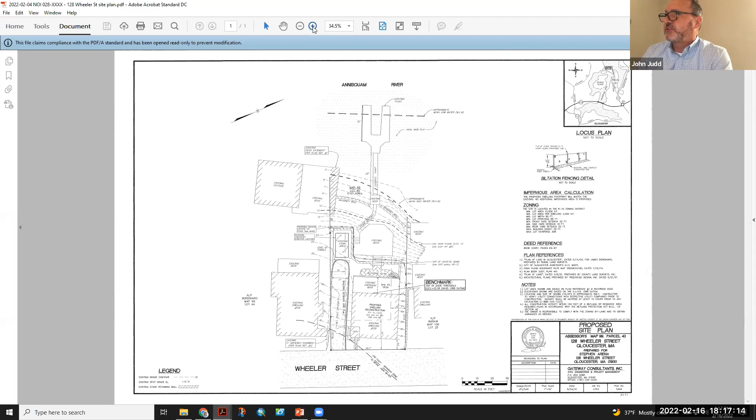You may recall at the last hearing there were a couple of requested modifications to the plan, which we submitted to the commission or to Adrian right afterwards. I can go through those minor revisions, one of which was to add the shrubs in front of this house. This is a reconstruction of an existing dwelling on the same footprint, the same foundation. There was a request to add the existing shrubs in front of the house and on the side of the house, with a note that any shrubs to be removed would be replaced at a 2-to-1 ratio.

This is the original plan, Adrian. We should have that modified plan revised the 3rd of February. One of the other modifications was, it was requested that we show that small catch basin at the bottom of the driveway, and where that outlet is a 4-inch pipe that discharges from that catch basin, and that is shown on the plan. Thank you, that should show it there.

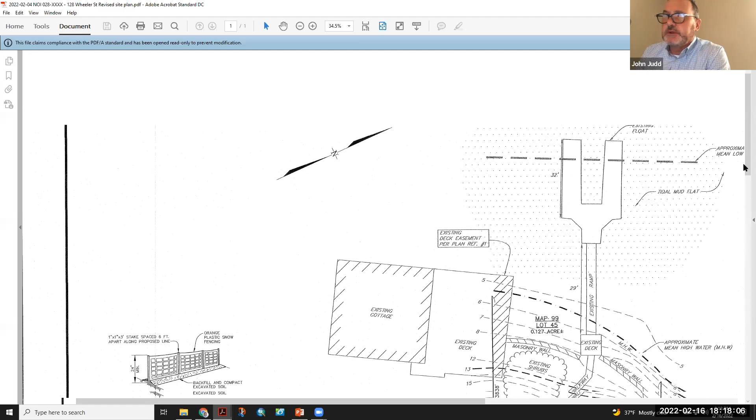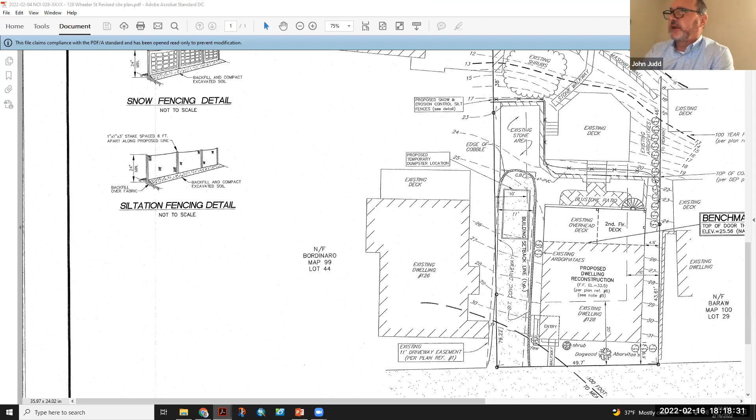A little bit further up, we'll show that catch basin. You can see at the bottom of that circular cobble line driveway, just below the proposed dumpster location, is a catch basin. You can see the 4-inch discharge pipe that goes into some crushed stone underneath the existing elevated deck. We did add a note that any shrubs or vegetation to be removed would be replaced at a 2-to-1 ratio, and that's shown on the plan as well.

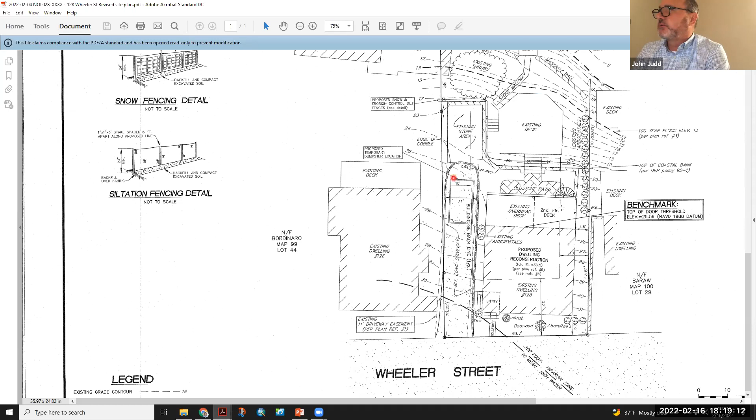So we did move that dumpster back into the paved portion of the driveway. There's a spot where it says existing stone area, that's where we originally had it situated - it's a flat area down there, but we moved that back into the paved area. I think that was one of the comments that was requested. On the upper right-hand side of the plan, we have mitigation notes indicating that a 2-to-1 ratio of replicated plants will be required for any of those shrubs to be removed. And I think that was it - those were the requested modifications.

Okay, so what I'll do is we'll open up for public comment first. Seems like we're having a little bit of a bandwidth problem tonight, so people just be patient. If anyone in the public wishes to speak for or against the project at 128 Wheeler Street, you may do so now by hitting the raise your hand button at the bottom of your screen or hitting star 9 on your phone or handheld device. There are 19 attendees on the call and no members of the public to comment at this time.

I thought we'd have someone. It was Barry. Who - no, I thought we might have someone talking about this. That's fine.

So, seeing none, hearing none, we'll close the public comment period and move on to commissioner roll call comments. Comments from commissioners: Commissioner Charpentier, no comments. Commissioner Cook, no comments. Commissioner Gradwall, no comment. Commissioner Sargent: Any mitigation plantings, will there be a 2-year monitoring of mortality?

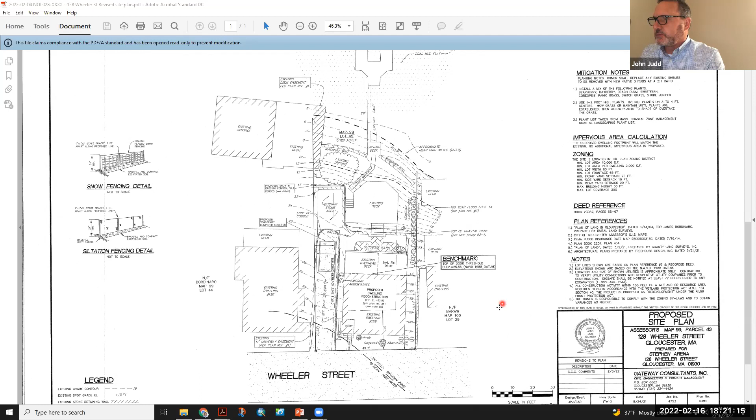Co-Chairman Gullo: My only comment was the tree loss. So we're gonna lose the dogwood out front. Are we gonna get the same species back that we lost when these are removed? I see plenty of arborvitaes.

Those arborvitaes are in tough shape. They might be beyond their useful life - I'm not sure how healthy they are. There's a yew on the front left and a conifer shrub to the right of the entry there, and the dogwood.

So those we could replace in kind. We did give a list of suggested plants, shrubs and trees on the plan that are more native and salt tolerant, but the main emphasis was native and a 2-to-1 ratio. That was what I thought we had agreed on. I just didn't know if - well, that's fine. I would agree with that.

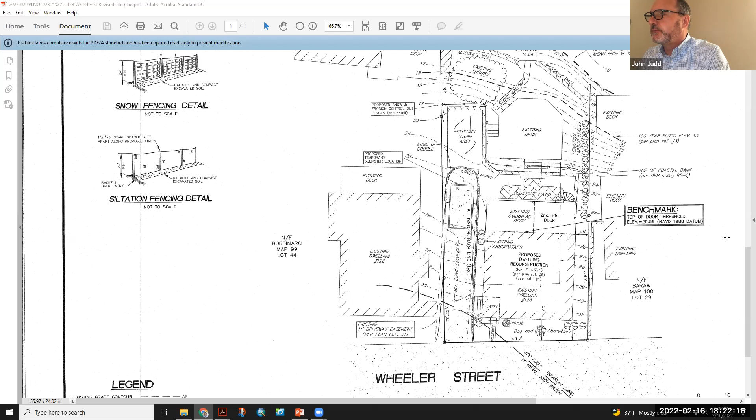Commissioners, any other comments on this? We reviewed it last time. We have a mortality clause - 2-year mortality on the plantings. Anything else to add?

If nobody has anything else to add, do we want to close the hearing on this? Sure. Commissioner Jackson moves to close the public hearing for NOI 0282825, Charpentier, 128 Wheeler Street.

Charpentier seconds. Roll call: Commissioner Charpentier, yes. Commissioner Cook, yes. Commissioner Gradwell, yes. Commissioner Sargent, yes. Commissioner Sherman, abstain. Co-Chairwoman Jackson, yes. Co-Chairman Gullo, yes. Thank you.

Okay, if nobody else has any comments, move to approve. Commissioner Jackson moves to approve NOI 0282825, 128 Wheeler Street. Charpentier seconds. Roll call: Commissioner Charpentier, yes. Commissioner Cook, yes. Commissioner Gradwell, yes. Commissioner Sargent, yes. Commissioner Sherman, abstain. Co-Chairwoman Jackson, yes. Co-Chairman Gullo, yes. Thank you all very much.

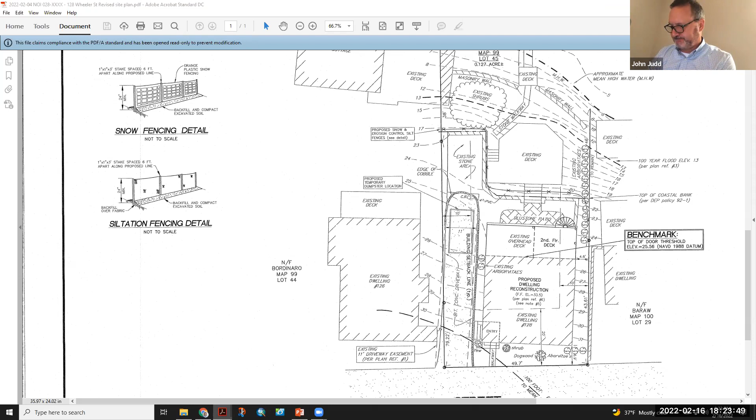You're welcome. Next up is Notice of Intent 28-2822, 30, 48, and 50 Atlantic Avenue, Goodhue. Bill Manuel at Wetlands and Land Management, Inc. represented.

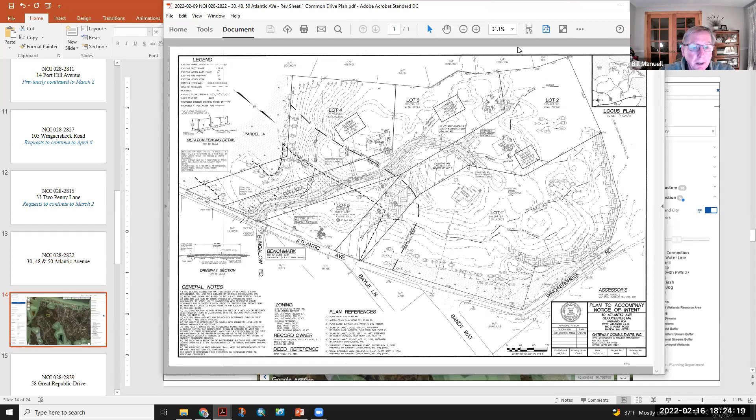Hi, good evening everyone. Bill Manuell from Wetlands and Land Management in Danvers. This is our second meeting, and we had our initial meeting where we discussed the project. We had a site visit that Dave, Rob, and Adrian attended. Since then, we surveyed and located the trees that would be impacted by the construction of the common driveway, and we have mitigated for those.

Also, we've shown a detail that now specifies a 2-foot wide gravel shoulder that, in conjunction with crowning the driveway, will have the water shed to the gravel shoulder and have opportunity for infiltration and shedding off to the side of the common driveway. That will alleviate the collection of sediment at the bottom of the hill on Atlantic Avenue. So we have that detail on the plan.

We have an area specified for the replacement of the 5 trees that are going to be lost. We suggest they be installed within the access and utility easement, so they won't be disturbed with future lot development. We have a specification for the trees - they're native specimens, listed right underneath the siltation fence detail. I think that was the extent of the comments, so if you have any questions, I'll be happy to answer them.

Okay, first off, I'll open up for public comment. Anybody in the public who wishes to speak for or against the project at 30, 48, and 50 Atlantic Avenue, you may do so now by hitting the raise your hand button at the bottom of your screen or hitting star-9 on your phone or handheld device.

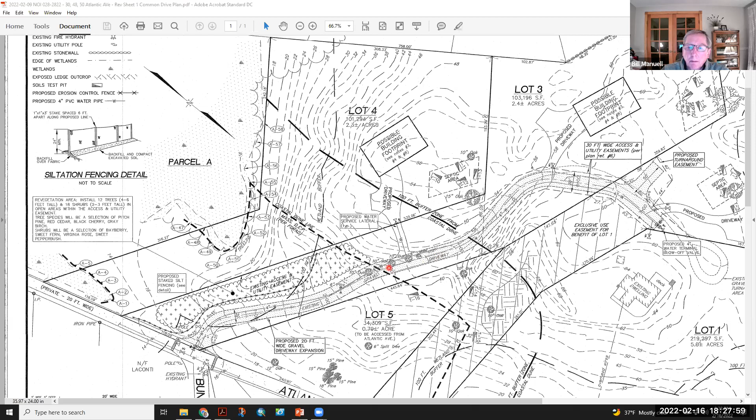I wanted to first thank you for indicating the cluster of evergreen trees on the revised plan that are across from my property at 53 Atlantic Ave. I appreciate having them shown there. I hope they'll survive all the construction of any type.

My questions are, it's been brought to my attention that the mailboxes and the sign for the WIA and the stop sign at the bottom of the drive are going to have to be moved, I guess. They're in the way according to this current plan, and I was wondering what's going to happen to them and who's responsible for dealing with that, because they're kind of important elements. Thank you.

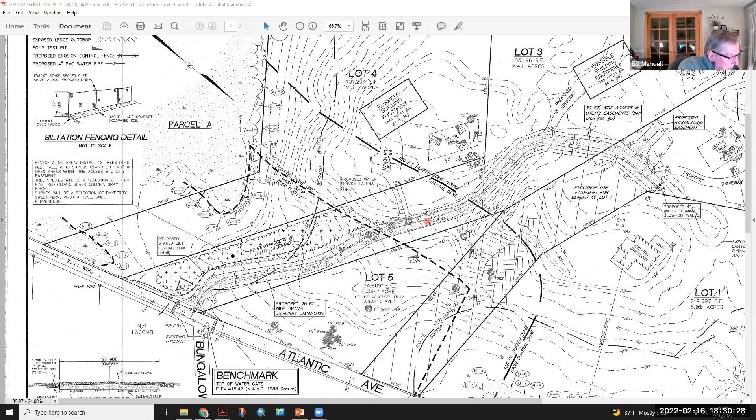Not that we take down nice maples or oaks and then put up arborvitae somewhere. No, the trees that are to be lost are labeled on the plan: a pine, an oak, an oak, an oak, and a cedar. The trees we're going to put back will be a choice of pitch pine, red cedar, black cherry, or gray birch. All of those do well in the sandy environment.

And I think we'll have to condition this with a mortality plan. Yes. Okay, that's what I had.

Okay, Commissioner Cook - oh, he's recused. Thank you. Commissioner Gradwell - no further comment. Okay, Commissioner Sargent - yes, thank you for the meaningful changes, Bill.

Because the mitigation areas are within the access and utility easement, will monitoring and maintenance of these mitigation plantings be the responsibility of the homeowners association? That's the first question. And then I agree with Commissioner Charpentier that there should be a 2-year mortality monitoring for mitigation plantings. Thank you.

Commissioner Sherman - okay. Co-Chairwoman Jackson - no additional comments. And Co-Chairman Gullah - no comments.

So with that, Mr. Manuell, do you mind answering the questions? Basically, I believe the paving issue, the parts that are jurisdictional to us, when you pave, you'll have to come before us again. The mailbox, I don't know anything about that. The 2-year mortality is self-explanatory and monitoring. I don't know if you had anything else on that list that you want to respond to.

Yeah, so we're not proposing to pave the common driveway now. And yes, if it were proposed to be paved in the future in areas of your jurisdiction, yes, the homeowners association would have to come back. I'm not in favor of any condition that prohibits it being paved in the future, because that's just something the commission can't impose on the applicant.

The mailbox and stop sign, yes, they do interfere with the driveway, and they'll have to be moved a little bit northerly. The contractor would do that at the time of construction of the road.

Yes. And the applicant, I assume, until a homeowners association is actually created - which would happen at the sale of a lot, or the first lot, I suppose - the applicant would be responsible for the survival of the trees and replacement. And then once the homeowners association is responsible, I would imagine they would pick up the cost.

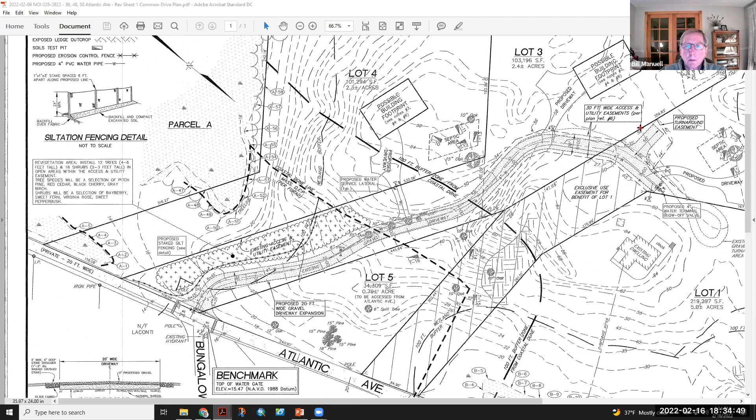So I think we're good, we should be good. Back to, just for the general public, anyone on the call now, if you're looking at the plan, to be clear, the area with the heavier or shorter dash lines through lot 5 and part of lot 4, and then the buffer outside of that with the larger dash lines, that's our jurisdictional area, everything towards Atlantic Ave. So it's minimal in the whole grand scheme of things in this entire lot, but we do have some controls.

When those lots come together, it says possible footprints, they will have to come before us again, so it will be reviewed again.

Okay, and Joe, if there's nothing else, do you want to move to close the hearing? Sure. Commissioner Jackson moves to close the public hearing for NOI 028-2822, 30, 48, and 50 Atlantic Avenue. Charpentier seconds. And a roll call, Commissioner Charpentier, Yes.

Commissioner Cook is recused, thank you. Commissioner Gradwell, Yes. Commissioner Sargent, Yes. Commissioner Sherman, Abstain. Co-Chairwoman Jackson, Yes.

And Co-Chairman Gullah, Yeah, with the aforementioned conditions of mortality, what were the others? Mortality, 2-year mortality, the mailbox is not our concern for us. And no paving, so just the mortality, I would guess, correct? That's what I have, yeah, so yes.

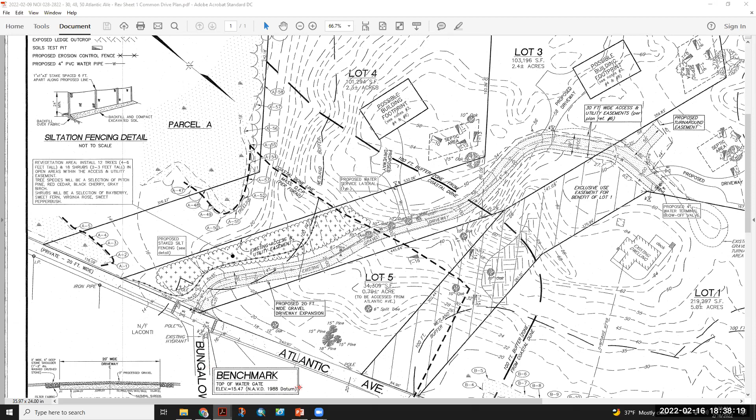We're good. Okay, next up, notice of intent 28-2829, 58 Great Republic Drive, 58 Great Republic Drive LLC, Scott Cameron at the Morin-Cameron Group, Inc., representing.

Let's find him. Oh, he's in our attendees. I believe this is Jarret. I'm going to promote you. It will take a minute for him to come over.

Hello? Hi, can everybody hear me? We can. Hi, my name is Jarret Bastys. I'm with the Morin-Cameron Group at 66 Elm Street in Danvers, Massachusetts. I'm here on behalf of the applicant at 58 Great Republic Drive. Scott Cameron had a scheduling conflict, so he wasn't able to be here, but he has asked me to come on. I've been doing a lot of the engineering work for this project.

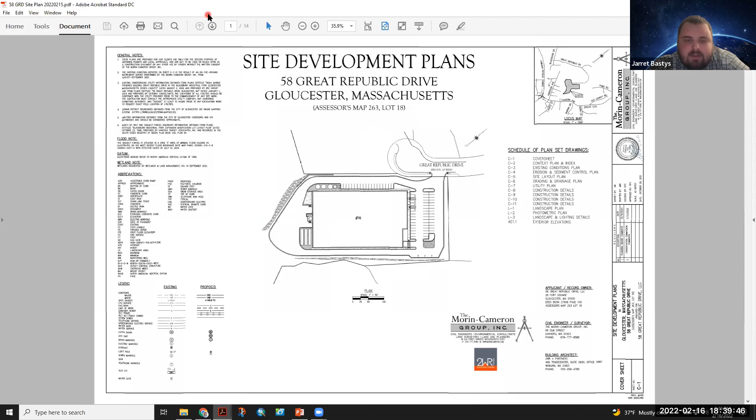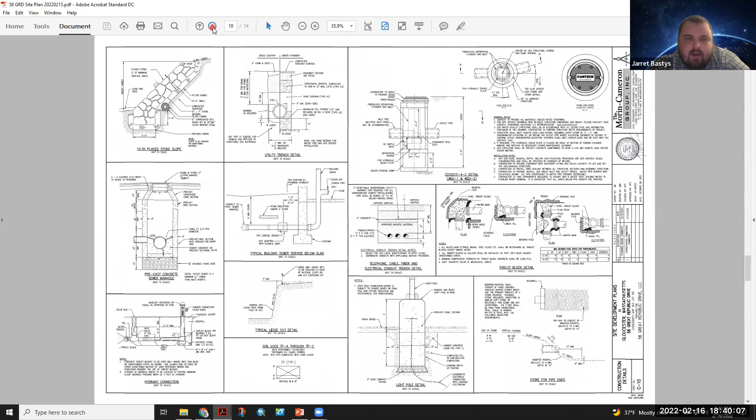At the last meeting, the commission expressed some concern about the tree mitigation in the buffer zone. So we took a look at that and went out onto the site and did a tree inventory. I'll show you, it comes up in a second. We measured 18 trees within the buffer zone that had an 8-inch caliper or greater, and we've shown on the landscape plan, yes, right there, we've replaced those trees at a 1-to-1 ratio along the limit of work in the buffer zone.

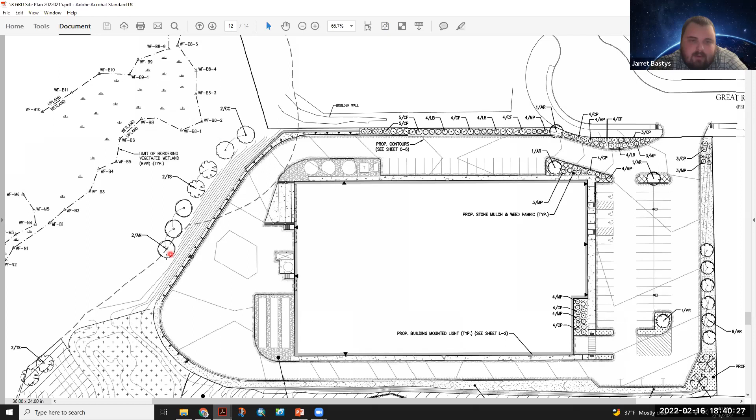Yep. And we've chosen American hornbeam, hemlock, and box elder maple as replacement trees for that.

You'll see along the limit of work, and then there's some down towards the bottom left. Oh, that little pocket, I see. Yeah, towards the edge of the area.

That's the only change we've made to the plan as of now. We've shown these diagrammatically, but we will have a landscape architect coordinate the final placement and planting. Those are the only changes I have to present. Thank you for your time, and I will turn it back over to the commission.

Okay, thank you, sir. Your Zoom presence put you out of this world.

Okay, so why don't we open this up to public comments? Anyone in the public who wishes to speak for or against the project at 58 Great Republic Drive may do so now by hitting the raise your hand button at the bottom of your screen or hitting star 9 on your phone. Chairman Gullo, there are 17 attendees on the call and no members of the public raising their hand at this time. Seeing none, hearing none, I'll close the public comment period.

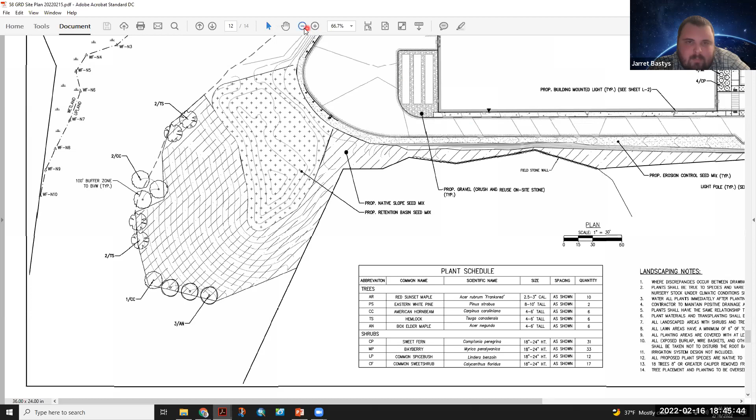So I guess the only thing to do, unless commissioners have anything to add, is we're gonna have to continue this to see a little more density in the planting, more closer to 2-to-1 for the canopy loss, and maybe the 7-inch diameter as well. Say that again, David, what are you looking for? The 7-inch diameter as opposed to the 8-inch diameter tree being specified. You mean drop it down to a 7-inch diameter requirement?

My understanding is that's what was always required when John was on the commission. So I'm not sure if you caught that, Jarret. Basically, if you go down to the 7-inch diameter instead of 8, you may have lessened your canopy concerns — it may result in less tree loss, is what we're getting at. But based on what I'm hearing from my commission now is that we're probably gonna have to continue to let you go look at that and double check the 2-to-1 mitigation and the 7-inch, not the 8-inch, diameter tree removal.

That make sense? Yes. Okay, I'm sorry about that. I don't know where the confusion was.

So with that, commissioners, if you don't have anything else to add. In fairness, I'm not sure we made those two requirements completely clear at the last meeting. Commissioner Jackson moves to continue NOI 0282829 58 Great Republic Drive to the following meeting of March 2nd, 2022.

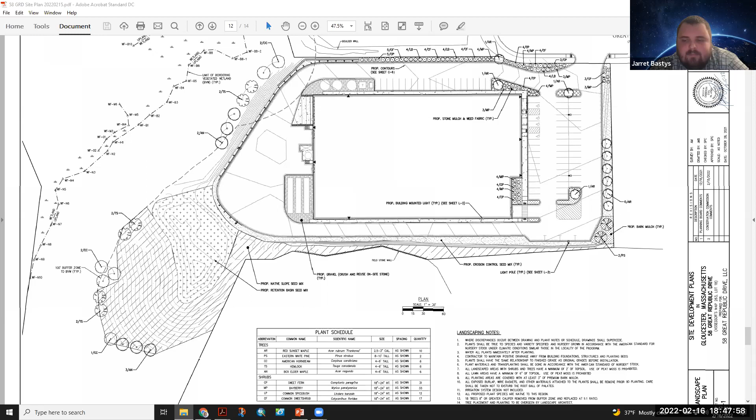Okay, sorry about that. See you in a couple weeks. Thank you.

Next up, 028-2828 Eastern Point Boulevard, Association of Eastern Point, John Gateway Consultants representing.

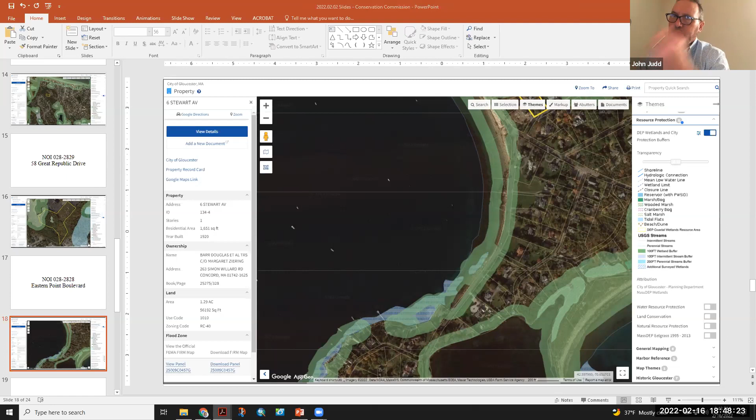Once again, thank you Mr. Chairman, members of the commission. For the record, John Judd, representing the Eastern Point, the Association of Eastern Point, for the proposed improvements adjacent to Raymond's Beach out on the Eastern Point section, Gloucester.

At our last meeting on the 2nd of February, I was given a few marching orders to modify the plan and also to come back with some information on the coastal bank. The armoring question was brought up, and you can see there what Adrian has.

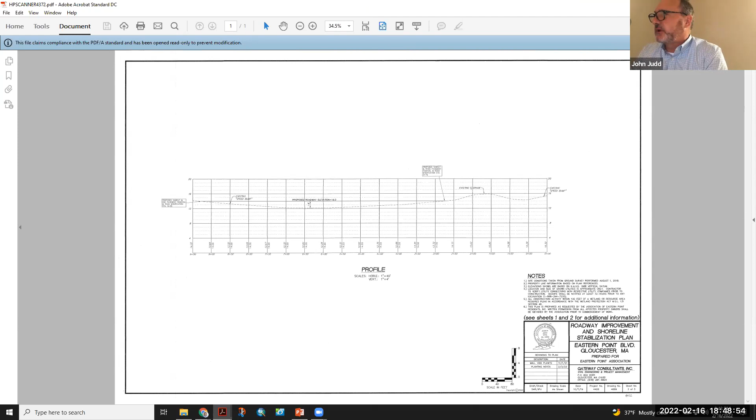There was some requested specificity on the planting spacing, and you can see we modified that detail with the revision date of the 3rd, I believe.

So what we did is we uploaded the NOAA National Oceanic recommendations for various stabilization techniques for various applications. One more slide, Adrian, we have more of a revetment. Sorry about that, there it is right there. You can see this is one of their techniques, which is basically what we have.

We have been working with various entities, including Mass Audubon and also the fire chief with this project. So we're bringing up the road at the highest point, 1.8 feet, due to the recent washouts from storm events in the last couple of years and the erosion that's taken place.

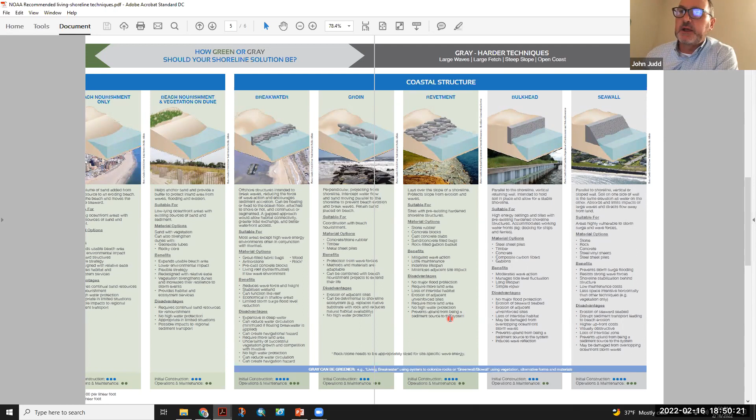So we're proposing 8-foot minimum spacing along the edge of the roadway with native plants to really make a robust natural buffer between the road and the top of the coastal bank. We have included the techniques recommended by NOAA for stabilization of living shorelines.

I believe those were the comments that were requested, and we modified the plans to indicate that. I can answer any questions you might have.

Okay, I'll open up for public comment. This is the period where anyone who wants to speak for or against the project at Eastern Point Boulevard may do so now by hitting the raise your hand button at the bottom of your screen or hitting star-9 on your phone or handheld device. Chairman Gullo, there are 16 attendees on the call and no members of the public to comment at this time.

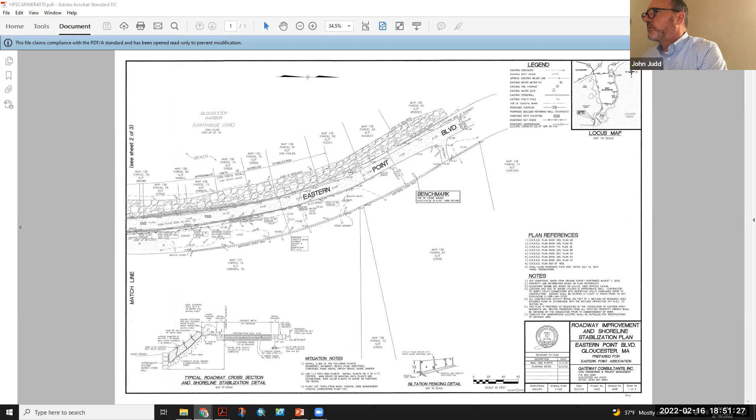Okay, with that we'll move to commissioner comments. Commissioner Charpentier, no comments. Commissioner Cook: I'd like to thank John for the additional details as far as the armoring of the bank. I guess the question I have to ask, probably you, Adrian, would be, have we heard anything back from DEP?

It's more that we wanted to provide the information, so we had something to go up against them with in that regard. I have seen no technical comments from the DEP regarding the raising of the road. So to be clear, Adrian, they wrote no comment? No, nothing has been responded or posted to the dashboard. Okay, thank you.

Commissioner Gradwell, no comment.

Commissioner Sargent: Thank you, John, for the clarifications. Just a minor thing, but on the plan it shows FEMA flood elevation at 14, and then later it shows it at 15. I think it's really 14, but that's maybe a minor typo. Previously I had asked where the staging area for the stockpile of materials would be. That's a really tight area, and I want to make sure it's not on the beach or in the wetland where it could be impacting resource areas. I want to make sure that all work is proposed to be accomplished from shore.

Thank you. Okay. Commissioner Sherman, no comments. Co-Chairwoman Jackson, no comment. Co-Chairman Gullo, no additional comments. Thank you.

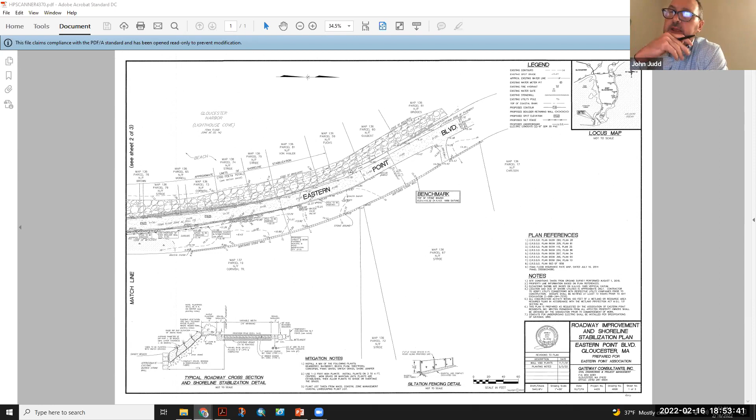Thank you. So the flood elevation is 14. I'm not sure where that discrepancy is from my plan, but that may have been a typo shown elsewhere. As far as you can see, the right of way on this plan is fairly wide, going up to the mortared stone wall, so we have quite a bit of grass area on the lower portion, on the easterly side of the Eastern Point pavement, which is further away from the top of bank.

I suspect that's where they'll use some of the grass area for temporary stockpiling of the stones. All work would be done landward, with machinery from the pavement reaching over and placing boulders with larger machines with thumbs, as shown in the detail. So the stockpiling area would be adjacent, on the easterly side, away from the coastal bank.

Okay. Thank you, Mr. Judd. Commissioners, anything else to add to this?

I think the only thing I had was that we'll probably just have a 2-year mortality plan on the vegetation to manage that. Other than that, unless anyone has other comments, why don't we move to close the hearing?

Commissioner Jackson moves to close the public hearing for NOI 0282828 at Eastern Point Boulevard. Charpentier seconds. Roll call: Commissioner Charpentier, yes. Commissioner Cook, yes. Commissioner Gradwell, yes. Commissioner Sargent, yes. Commissioner Sherman, abstain. Co-Chairwoman Jackson, yes. Co-Chairman Gullo, yes, just with the comments that storage, work from shore, and 2-year mortality be put on the final approval.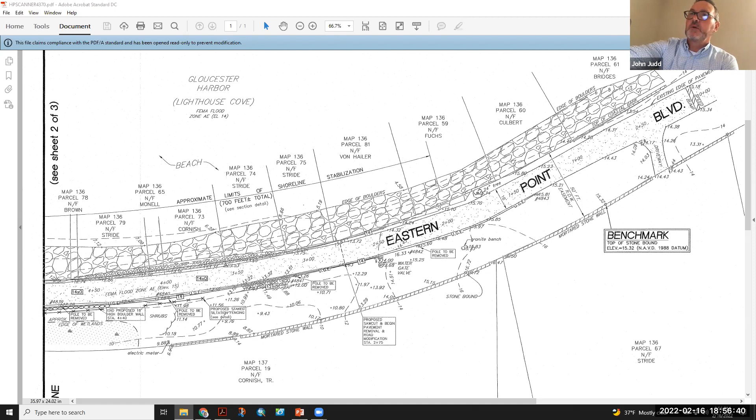So next up is Notice of Intent 28-2826, 49 Two Penny Lane, Benjamin Bradley, with Dan Ottenheimer of Mill River Consulting representing.

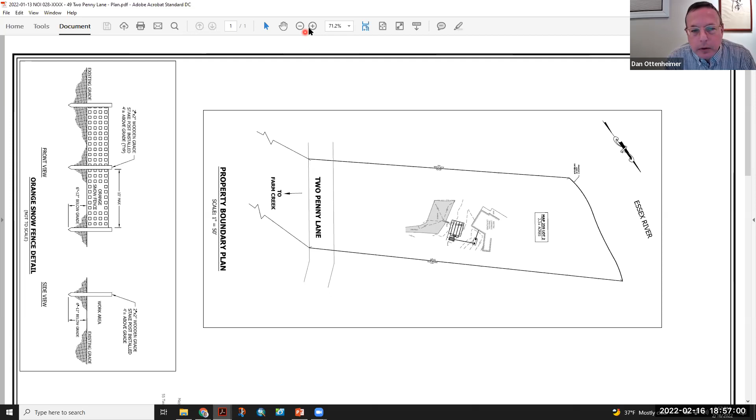Good evening, commissioners. Can you hear me okay? Yes. Great, thank you. Hi, so we're here representing Benjamin Bradley Jr., who, as a side note, he and his father are two of the most distinguished journalists in the history of the United States. Not that that would impact your vote tonight, but just something you might want to take a look at. It's an honor to have the opportunity to work with Ben.

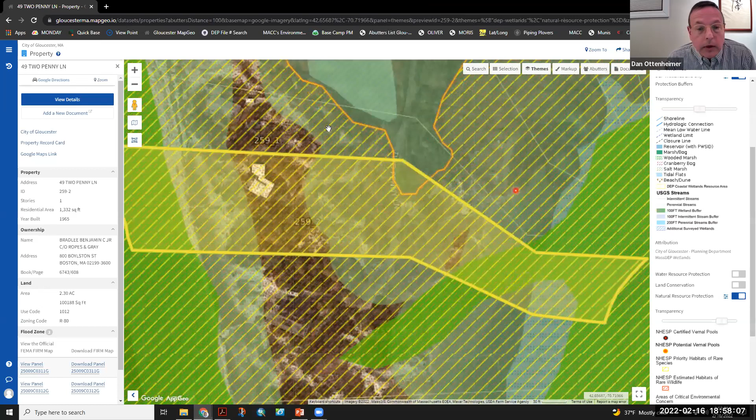He owns a house at 49 Two Penny Lane that needs to replace the on-site wastewater system. It's an absolutely lovely location and a very sensitive site. The project involves removing the existing septic system and installing a new one. The work is within land subject to coastal storm flowage, and also within mapped habitat of the Natural Heritage and Endangered Species program.

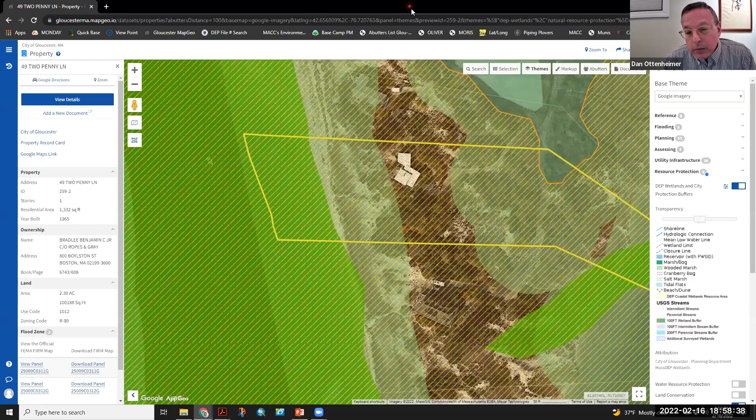They came back with comments just yesterday saying they have no concerns with this project. There's also dune throughout this site and neighborhood, so we focused our work on minimizing any resource area impact. Everything we're looking to do is within the region between the existing house and the existing parking area, minimizing work in natural settings since this is already a disturbed setting. The septic system construction is probably about a week's worth of work, and we've implemented several protective measures.

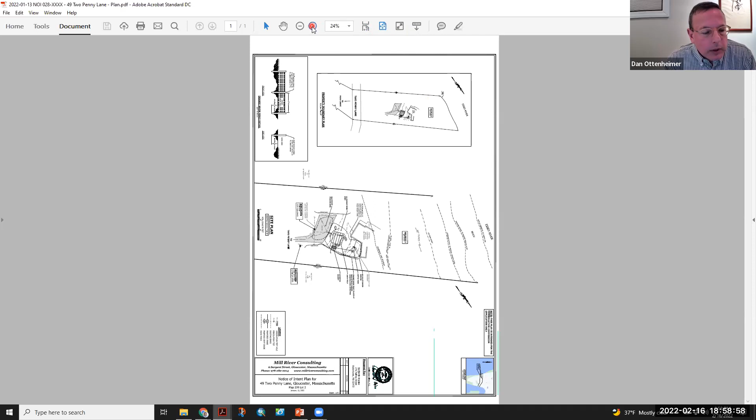Adrian, if you could scroll down to the other drawing on this page, that would be appreciated. So you can see a few things we've done: we've restricted the work zone so the contractor stays within the areas they need, established an equipment staging area within the existing parking lot, and we'll be putting up orange snow fence at the base of the dune so we don't accidentally disturb it.

And we're also putting in a very high quality septic system so that the effluent going into the ground is very high quality water as well. After construction, we're going to stabilize the area with the planting of American beach grass. The septic system itself will be examined on a routine basis to make sure it's properly functioning, as part of the approval from the Board of Health. So that's the project.

First up, I'll open up for public comment. Does anybody in the public, anybody who wishes to speak for or against the project at 49 Two Penny Lane, may do so now by hitting the raise your hand button at the bottom of your screen or hitting star 9 on your phone or handheld device.

Co-Chairman Gullah, there are 12 attendees on the call and no members of the public to comment at this time. All righty, seeing none, hearing none, I'll close the public comment period.

Commissioner comments? Roll call for commissioners. Commissioner Charpentier, no comments. Commissioner Cook, no comments. Commissioner Gradwell, no comment. Commissioner Sargent: yes, Dan, in the narrative under number 5, proposed work, it sort of left the door open that if environmental conditions weren't appropriate, that dune grass wouldn't be planted. I want to make sure that if environmental conditions aren't appropriate, that they will be planted at a time in the future when it is appropriate.

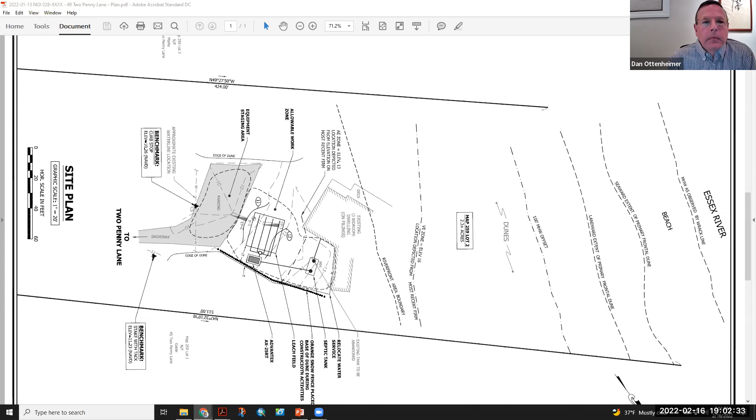Okay, if there's no other comments, move to approve. Commissioner Jackson moves to approve NOI 0282826 at 49 Two Penny Lane with the aforementioned conditions. Charpentier seconds. Roll call: Commissioner Charpentier, yes. Commissioner Cook, yes. Commissioner Gradwell, yes. Commissioner Sargent, yes. Commissioner Sherman, abstain. Co-Chairwoman Jackson, yes. Co-Chairman Gullah, yes. Thank you.

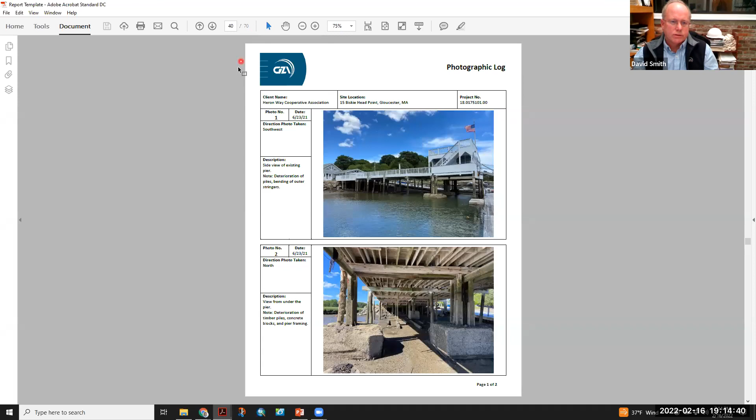So with the reconstruction of the pier, the Heron Way Marina folks wanted to take this opportunity to raise it up. We're going to raise it a foot total in height from the existing elevation, so it's going to go up to elevation 9.5. There is a landward portion of the pier that we're going to keep at elevation 7, and that will be for ease of access for loading and offloading for the marina patrons, so at least they have a place to put things.

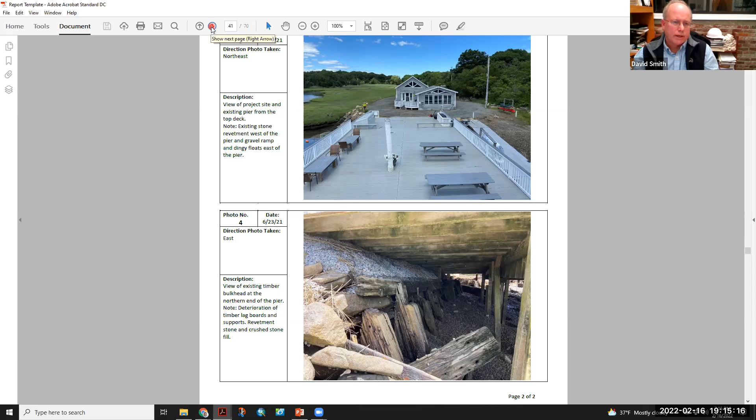And then it'll go up by either steps similar to what exists now, or a ramp that'll be located off to the side of the pier. There's currently a 27-foot wide by 20-foot gazebo and stairs that lead to an upper level deck that is on the pier, as you see in that photo right there. That's going to be removed.

We are going to replace that with a gazebo that's going to be smaller in size, roughly 16 by 24. It's actually going to be set back 12 feet from the front face. You can see it right up towards the seaward face, the southern face of the pier. The new structure is going to be set back from the edge.

And you can see in that photo, that's a good photo, and actually the one following that, you can see the piles, you can see the concrete mass underneath. That's a great photo there that shows underneath the pier at low tide.

This pier back in the 1940s was built over an old barge and scow by previous owners. In 2004, when the marina was dredged, many of those remnants of that old scow were removed as part of mitigation for that project, and it was limited to just what could be easily moved by hand. There are still components of that scow that you see there in the background of that photo.

So what we're proposing is we're going to remove all of those timbers. They're on the bottom, and they should easily be able to be picked up off the bottom. We don't need to excavate to remove them. They're all pretty much at the surface, along with all the concrete blocks that are there, and certainly the whole pier structure itself. So the pier is going to be rebuilt in the same footprint, 32 by 96.

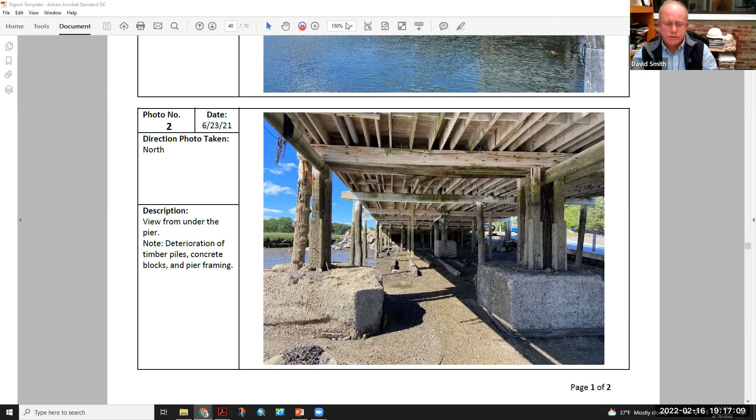It's going to have new pressure-treated timber piles, timber framing, and timber decking, and the function of the pier will remain the same. It'll provide access out to the floats that are out there.

As part of this project, we're upgrading the gangway. Instead of 3 feet by 45 feet, it'll be a little wider, 3.5 feet by 48 feet, and a little longer to account for the increase in height of the pier.

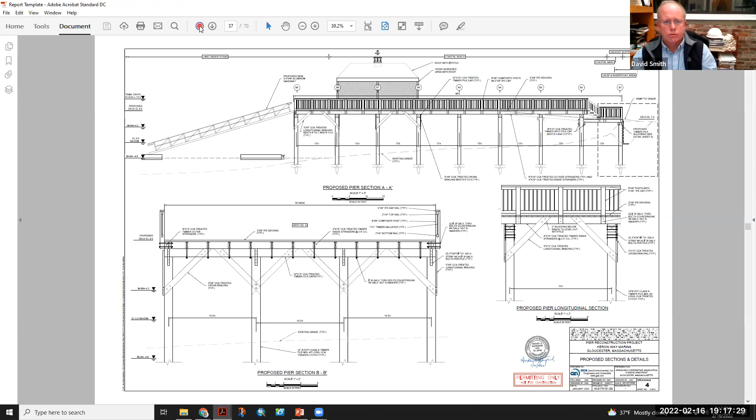As part of this project, we're also going to replace the timber bulkhead on the land side, where the pier meets up to the land. There's a stone revetment on the west side that wraps around the property and comes up to meet underneath the pier. There's a timber bulkhead with timber boards and some rock fill that support the land.

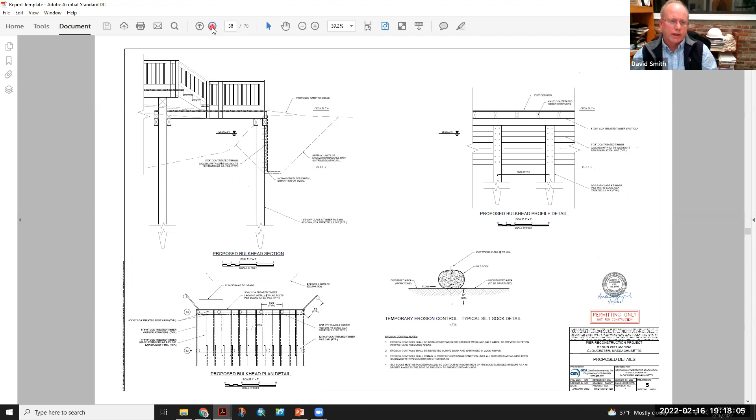Yeah, you can see photo 4. So that's what's underneath there now.

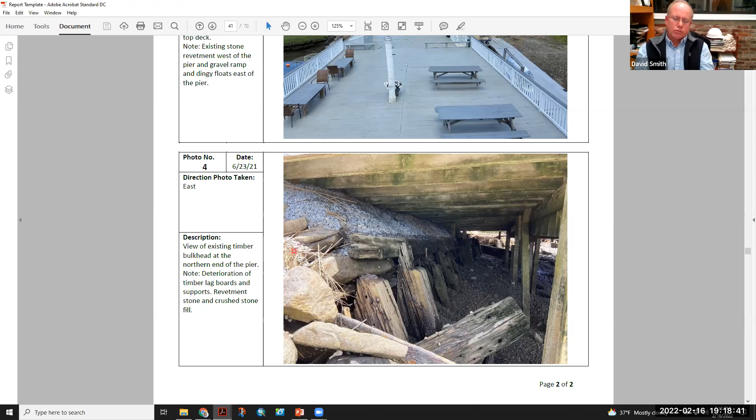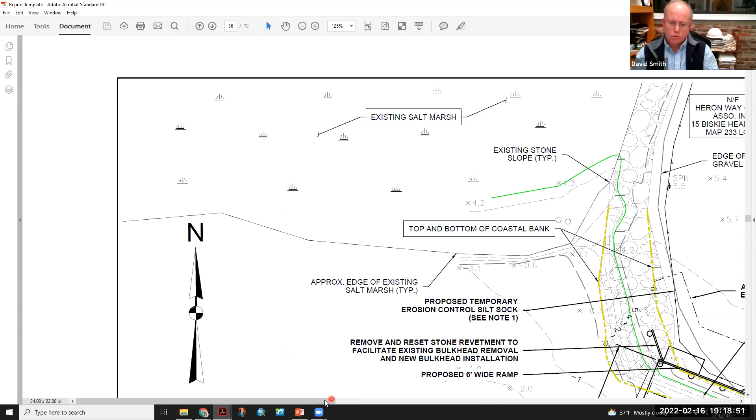So what we're going to do is integrate that first bent of piles and add more piles along the bent length. Instead of 8 feet on center, they're going to be 6 feet on center. We'll put timber boards behind it on the land side to retain the fill, and the existing bulkhead will be removed. We're going to extend it 6 feet beyond the edge of the pier on both sides, dying off into the stone revetment on the west side and dying off on the east side right at grade level. The idea is so they won't have any washout or need to address that area underneath the pier in the future.

This work is going to take place in the off season. We envision somewhere between November and April or May, probably before May, so it'll be taking place over the wintertime.

It'll be accessed from land. The majority of the project can be accessed from land, and depending on the contractor's equipment, you may be able to reach the far seaward end of the pier to drive the piles, but we want the option that they might come in by barge. The barge would be positioned on the backside of those floats so it won't ground out. It would be used during periods of high tide to do the work, then moved to deeper water when low tide occurs.

I think that's pretty much a summary of the project. A very good summary, by the way.

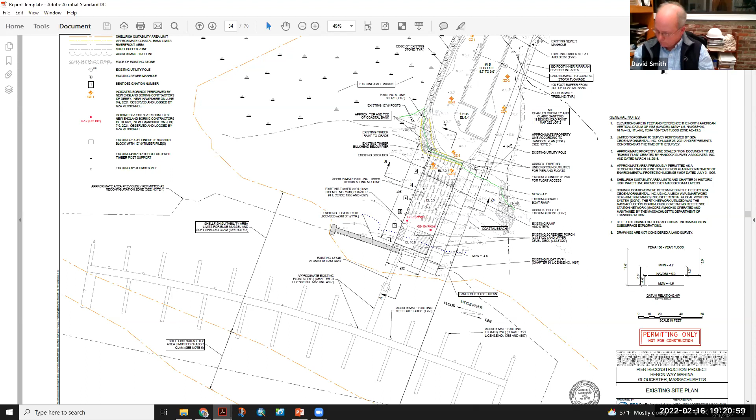Why don't I go through my questions and comments, and since I first have a question, I guess I could go through it all and then get a response at the end. Is that the way I should do it, or should I ask a question and then get a response? I would just, yes, you would ask the question and then we go through all the public comment. Okay, and so then it would be the applicant's responsibility to take note.

The first is just a question, and I'll take my answer at the end. When we did the work on our property a few years ago, I walked this with Ken Whitaker, and our property was flagged such that the upland edge of the marina lot was the resource area. So the entire marina was considered the resource area, and our 100-foot buffer zone starts at the upland edge of the marina parking lot and goes 100 feet up, meaning all of our property is basically in some zone. I walked it with Ken because I was a little frustrated, since it's a parking lot—every year they bring fill in and grade it with machines—and yet I have to treat it quite carefully, with a 100-foot buffer from that.

It was explained to me that that was filled marshland, and so thus it was considered the resource area. In this plan, the parking lot is considered the buffer zone and not the resource area. So that's question number one.

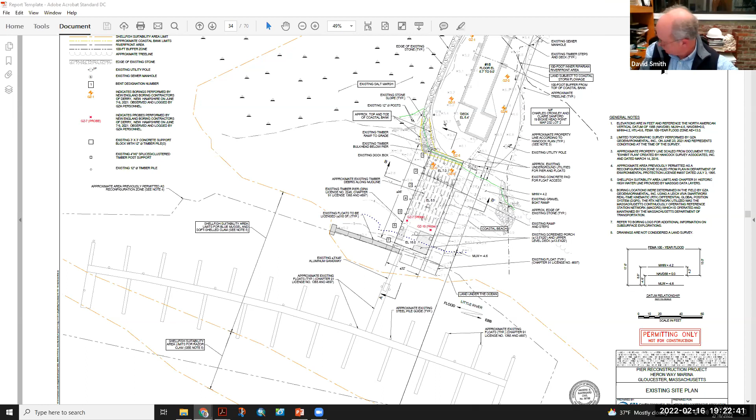The second issue is that there is a long history of Chapter 91 permits for this property. There were 3 Chapter 91 permits. There's 2248, which is cited for the pier, and that was to build the pier. We've spent a lot of time with attorneys researching these permits, so we're pretty certain about what's going on. That 2248 was issued in 1940 for a 32 by 100 pier.

The pier was accessed from the shoreline by a 30-foot by about 15-foot walkway, pier supported. That walkway has now been filled, so that's where he's talking about the bulkhead going to the pier. That 30-foot was filled, but it has never received any permitting. So there are no Chapter 91 permits for that.

The second license issued for this Chapter 91 was number 1365, issued in the 80s, for the gangways and the floats, and it incorporated license 2248 without any changes. Then later in the 1990s, there was license 4697, for the dinghy floats and for a gazebo, which was on the pier.

The gazebo is exactly what it is—as you go down the pier, it's the building to the left. The building to the right, which is a barbecue area and is actually larger, was never permitted, so that does not show up on a license. That was roofed in about...

2008. I was a member of the marina at the time. It used to just be a cloth covered enclosure, but without permits the roof was put on and the sides were done. So the question I have is, when you're looking at this and doing an alternate analysis, you kind of look at what you've got and what is legally there.

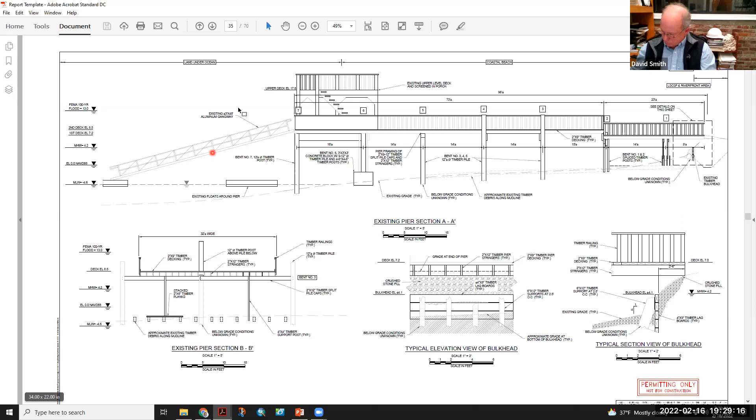Commissioner Sargent. Yeah, thank you for proposing to remove the remaining debris by the bulkhead. That was left over from the previous dredging issue. This is an environmentally sensitive area. There are active shellfish beds and an anadromous catadromous fish run in the Little River.

The applicant has not presented sufficient evidence that this project proposes to be in compliance with some wetland regulations, specifically 310 CMR 10.34, land containing shellfish, and 310 CMR 10.35, banks and land under the ocean, rivers, lakes, and creeks that underlie anadromous catadromous fish runs. In order to protect these interests, at a minimum, all construction material that contacts the water, including but not limited to the bulkhead and pilings, should not contain any materials that would be harmful to the marine environment, such as CCA.

In order to not disrupt the state-recognized alewife fish run, there should also be a time of year restriction, or TOY, for all work done within the water from March 15th to June 15th. There should also be comments from the Shellfish Department, Division of Marine Fisheries, and the Harbor Master. Thank you.

Thank you, Commissioner Sherman. I have a question about the footings, the concrete footings and the revetment. Are those going to be repaired, or is it going to be the exact same footings used to build a new pier? It seemed like some of those footings are in kind of rough shape, and I'm just wondering if there was a plan to either replace or repair those footings and the revetment.

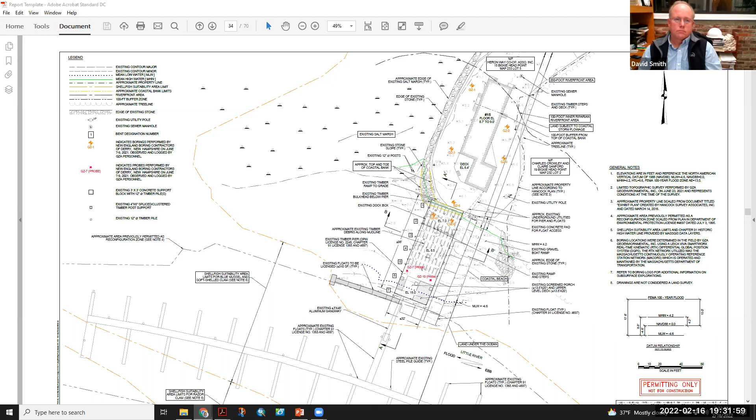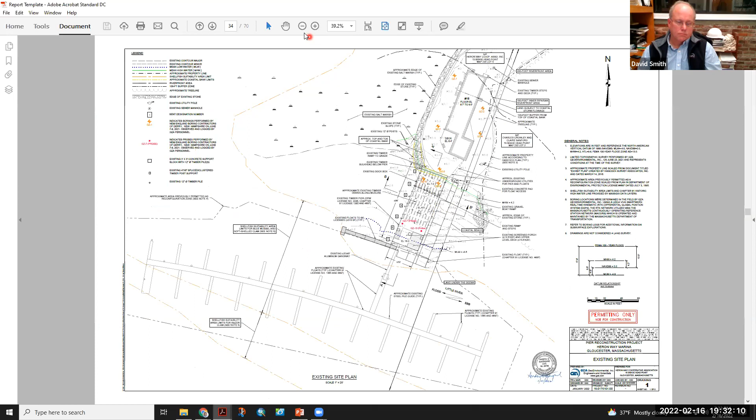Otherwise, I think there's still a lot of work based on comments from other commissioners and the public. We need a little more information, at least in terms of what materials we're going to be using, as well as some of these structures, and whether or not they need to be permitted prior to our review. They may not be, but I think we're going to need to continue, but I'll allow the applicant to make some comments prior to continuing. So if Mr. Smith wants to chime in, you're welcome to do so now.

Sure, great, thank you. Mr. Smith, before you begin, I just want to recognize Attorney Nyland does have his hand up. So I don't know if you would like him to speak first, or you would like to wait, or you would like him to wait and you can speak first.

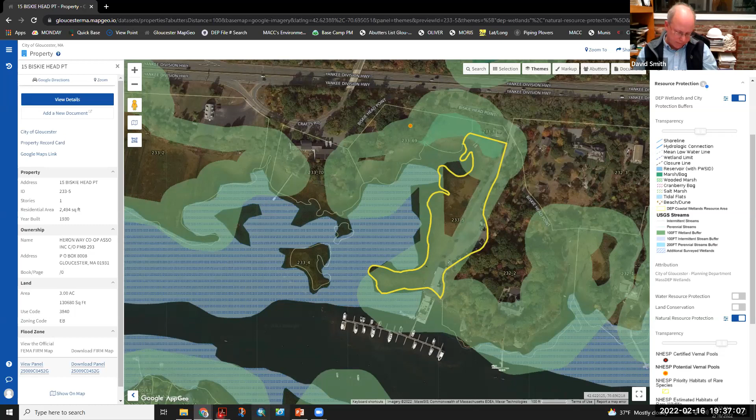The sink in the barbecue area, I admit I don't know anything about this, so I will need to investigate and get back to the commission on this. There are the piers too.

One of the commissioners wanted to know about those concrete blocks. Yep, I'm going down my list. Commissioner Cook had the comment about the roof structure. I believe the existing structure, I call it a gazebo, but it's a screen porch. I believe that is a flat roof that's on there that is waterproof.

That was my understanding. The new roof will shed water onto the existing deck. The deck will be permeable, with gaps between the deck boards, just like what exists now. We don't propose any changes to what basically occurs. It will be a smaller footprint than what's currently out there, but I can elaborate more when we come back.

The sink, again, I'll investigate that and address that. The other comments regarding non-toxic and CCA treated materials, I will respond back to the commission in writing. We have used CCA treated timber piles on numerous jobs, most recently Magnolia Pier, the large deck structure at Cape Ann Marina. So certainly it's a cost-effective way to support this pier. It would be cost prohibitive to get into concrete or steel.

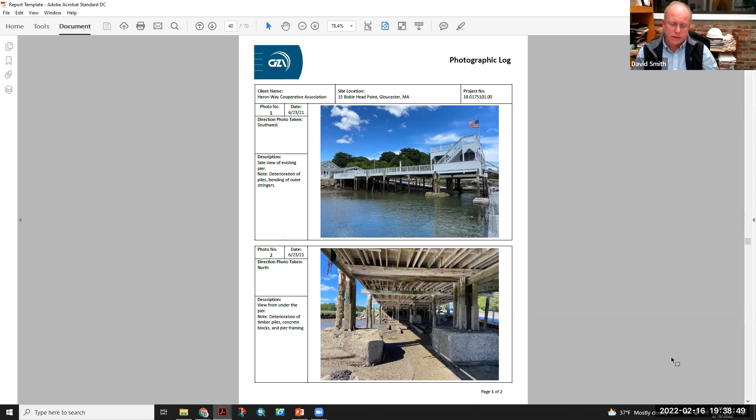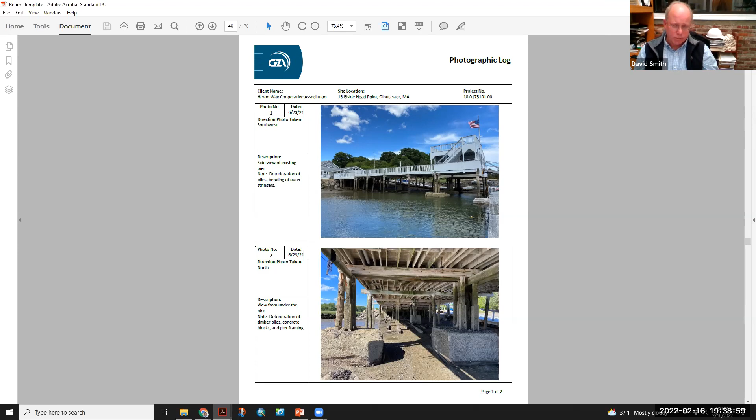Even Greenheart timber piles are very hard to come by. They're coming out of Guyana, and we're sacrificing the rainforest to get those piles. The quality, availability, and cost has been tough to come by lately, like everything else. But I can address that before the next hearing.

As far as the time of year restriction, we certainly would entertain whatever the comments are from Division of Marine Fisheries. They are the ones that usually request the March 15th cutoff. So hopefully with the start of construction in November, we would complete all in-water work by March 15th. I don't see an issue with that.

I did send copies to the Gloucester Shellfish Constable and the Harbor Master. They both emailed me back saying they would provide comments before the 16th. Adrian, did they not respond? I don't have comments from Shellfish and the Harbor Master. Traditionally, the commission will request comment from related departments, and I will take that into the second hearing.

Okay, and I can reach out to them as well. Did we get any comments from Division of Marine Fisheries? I have not received anything from DMF yet. Okay, I will check with them as well.

The question with regard to the footings, those concrete footings or supports that are out there now, everything's going to be coming out. We plan to drive the new timber piles, which are 12-inch diameter, to refusal, so there won't be anything on the mud line. As I said earlier, we're looking to clean up that site, get out all the debris on the bottom, including the concrete blocks that are there. So that's how it'll be supported.

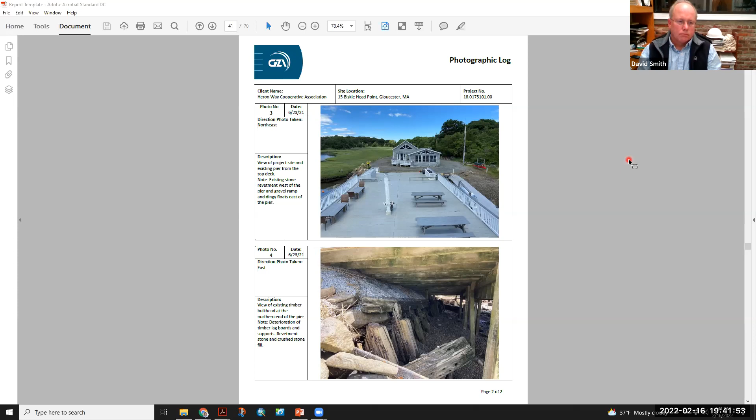Okay, anyone else, commissioners, before we send them back to work? Okay, so Mr. Smith, I don't know if you want to answer this question—are these all bearing piles on footings, or are they driven piles that you'll be removing?

The original piles are driven piles. There were some piles or posts under there now that I think just got kind of scabbed in and are sitting on timbers that are sitting on mud. So it's a combination of different eras.

So that may be something we ask you to add—that we tend to prefer to cut them at the mud line, not pull them. If this moves forward, that would probably be a condition.

Yeah, I think in our narrative we said we could cut or pull, but we would need to pull them if the piles are in the footprint of the new piles going in. Okay.

Commissioners, anything else? I saw something, but I'm not sure—do we have to vote on the alternatives analysis? Why? We should.

At some point we probably should do it now. We're supposed to do it before there's any discussion of the project, I believe. I know, that's why I'm a little concerned. Well, kind of jumping up, we should vote on it.

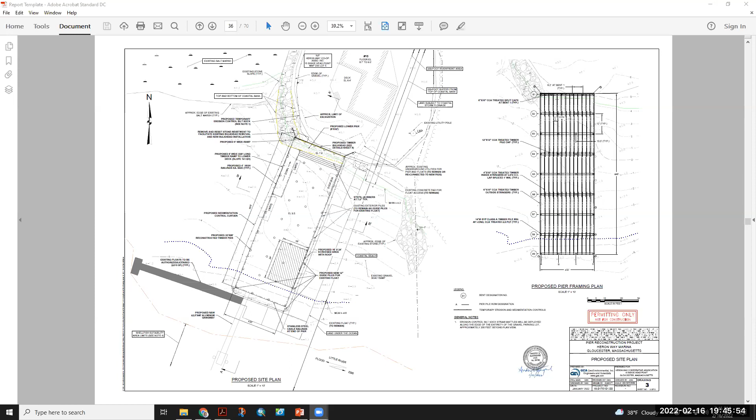Okay, let's go ahead. For the next two, have the DEP numbers been dropped or are they still missing? I do not have DEP numbers for either. Okay, we have notice of intent, no DEP number, for 39R Nashua Avenue, Stern, John Judd at Gateway Consultants representing.

This looks like a different plan here. This is Carol, this is the next one. There we go, hold on. That's okay.

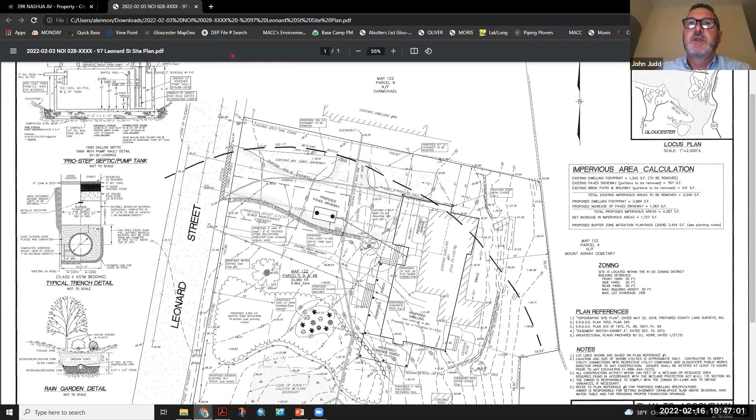The proposal is for a new single-family dwelling with a screen porch and a covered porch, fairly modest size, with a gravel driveway area that would access off the existing gravel area toward the south of the property. The proposal also includes mitigation planting that would equal over 200% of the proposed impervious area, as well as utility connections that would go to the existing service gates in Beach Avenue. The proposal is for mitigation planting to offset the impervious area with a ratio of 2 to 1. The entire site is within resource area buffer zones.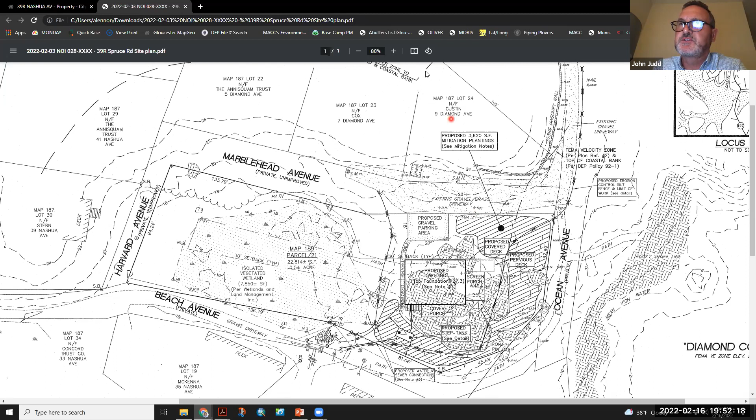So there's a small pervious deck, you can see it toward the right there, a very small section. Okay, so basically it's a wraparound covered porch, basically. Yes. Okay.

And on the proposed step tank that's coming in, now is this going to... you said we're getting water and sewer connections coming in from, yeah, they already exist. There's services right there, existing service laterals for this lot. Okay, that was the only question that I had.

Still working a little bit with Carrie McKenna. We'll go to the next. Commissioner Gradwell, no comments.

Commissioner Sargent: Yes John, I'm wondering if any trees need to be removed. I'm also wondering if any site dewatering needs to happen, it shouldn't be directed into the coastal beach or into the isolated vegetated wetland without appropriate treatment. And there should be a 2-year monitoring for mortality of mitigation plantings.

Thank you. Okay, Commissioner Sherman, no comments. Co-Chairwoman Jackson, no comments. And Co-Chairman Gullo.

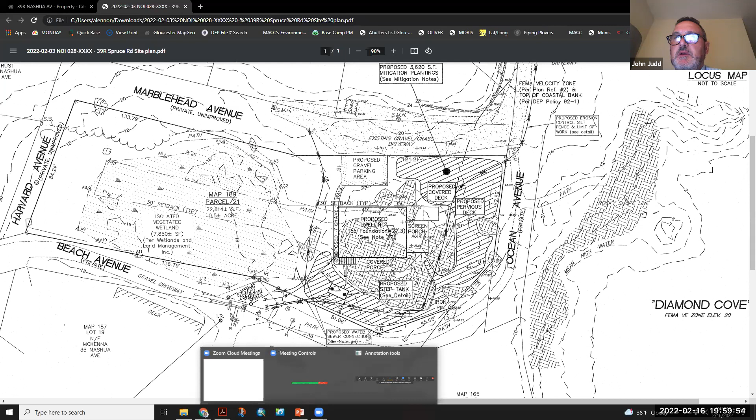That goes around the wetlands. Is that accessible only by the homeowner? Yes, that's a footpath, Bill, that goes from the property on the other side of what's shown as Harvard. Okay, so if you're putting the split rail fence up, you're basically going to be shutting off that path, correct?

Well, I suppose we could leave — so you're saying you would like that path not to be closed off? No, I just want to specify that the path would be closed off if you're putting the split rail fence in where your erosion control is, then effectively nobody should be using that path, correct? Yeah, so we could also leave a 3-foot opening just to continue that access by foot for the other parcel.

Well, if I may chime in, because I'm the one who said it, I would like to have that split rail fence, if the applicant was willing, let that area revegetate. I'm a little concerned about having just— but I'm just asking if the applicant's willing to let the fence stay all the way through and not have that path be accessible. That would be much appreciated, but not a requirement. We definitely need the split rail fence. If you want to keep the 3-foot opening, that's fine, we will show that.

Thanks, Bill, for that. Follow up, anyone else? I think there still should be the 2-year monitoring of mitigation plantings. I concur.

Okay, if there's nothing else, we want to continue this to the next meeting. Is that what we're doing? Waiting for the DEP? Yes, please.

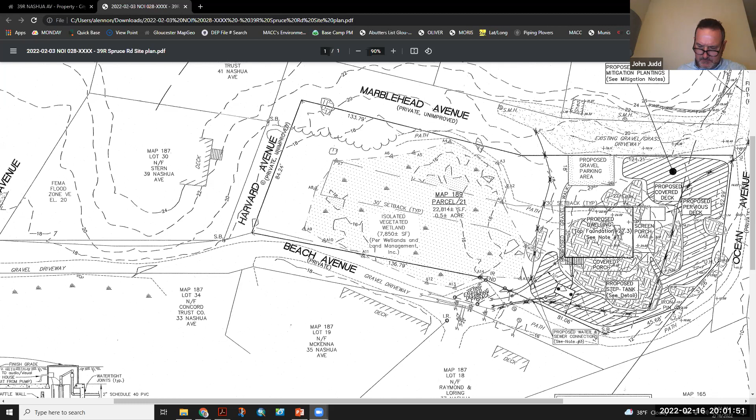Okay, next up, no DEP number, 97 Leonard Street, Bailey. John Judd at Gateway Consultants representing.

Thank you, Mr. Chairman and members of the commission. Last item tonight for myself, representing Carole Bailey, who is on the Zoom call tonight. This is an existing dwelling on Leonard Street, and Carol would like to reconstruct the existing house.

You can see it's the parcel outlined, and there's an existing structure there. The applicant has been in front of the zoning board of appeals to construct a garage on the upper side of the drawing without much luck, or I should say from the neighborhood. I guess one particular abutter did not want it. So we're going back and proposing the plan that you see before you.

This plan shows the new structure meeting all zoning requirements as far as building setback. So essentially, Carol went through the expense of redesigning the house to pull it away from the abutter's lot line. However, we are entirely within the buffer zone with the proposal shown on this plan.

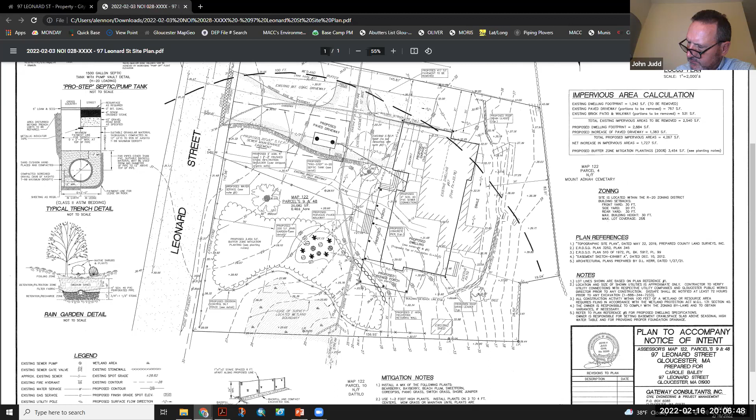Hi, this is Kevin Carmichael. I am the abutter at 99 Leonard, directly north of this property. I just want to say that I'm very thankful for putting the pipe on the plan and calling attention to it, because it is vital to our dry basement. So I want to say thank you for that, and good luck with the project. Thank you very much.

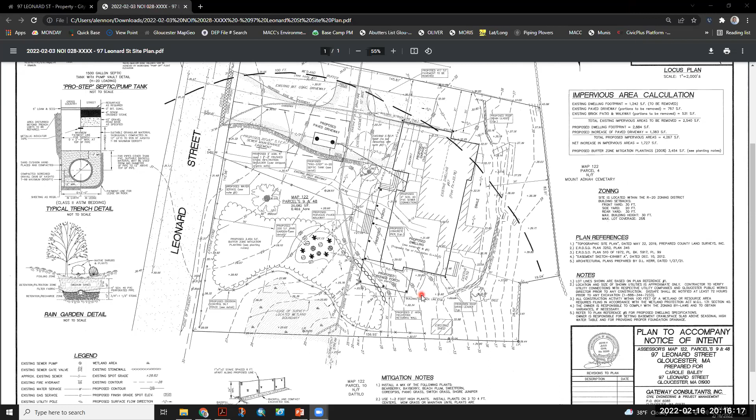Relative to Mr. Cook's comments, as you probably know, Mount Adnah Cemetery is behind the property, and you can see there's quite a slope that comes down toward the back of the house. I spoke to Pete Shea, the attorney for the clerk of the corporation for the cemetery today, and he has no problems with the project. He wished us the best, as well as another neighbor across the street who was very supportive.

My point is that slope comes down off the cemetery. The intent is to remove that portion of the building, as Bill points out, and allow that swale to be constructed to allow that drainage to come down, and that would all be stabilized in a grass swale. We're protecting the wetland area with staked erosion control that's going to be further down adjacent to the wetland.

I believe those were the comments. Mr. Sherman had comments about the property having changed significantly since he was last out there. Again, Carol's only owned the property for less than about 3 years and intends on doing everything appropriately and legally. I'm sure she's on the call listening. We're not going to hold her responsible for anything someone did prior, so I don't want her to worry about that. It was just more, we went through, it was bad with the previous owner, so it obviously stings. But we're not going to hold her responsible for someone else's actions, so not to worry.

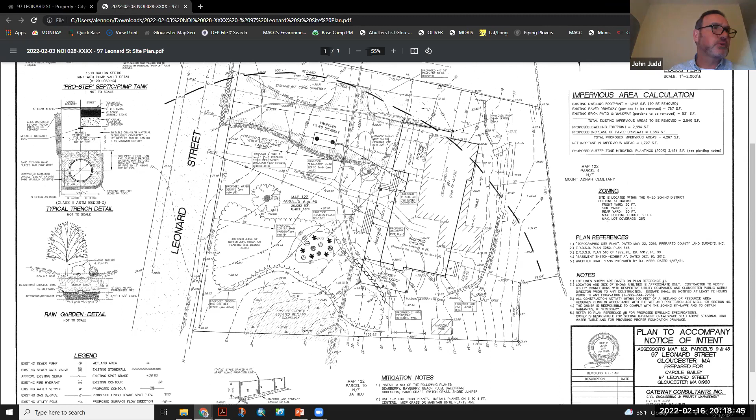All right, good night. Thank you, Bob. Have a great night. You too. Next up, we're into other commission business.

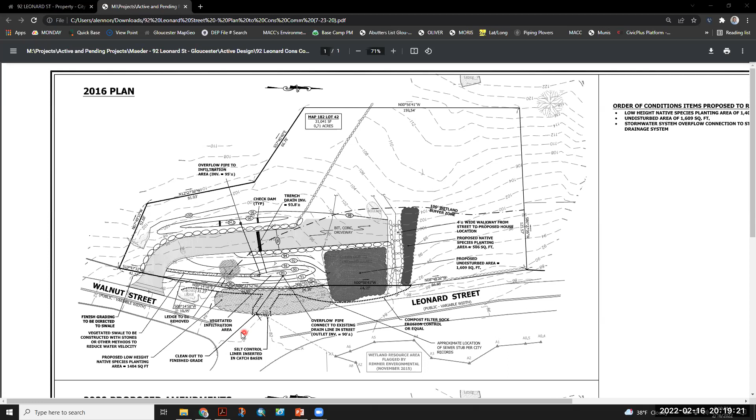I apologize, you need an extension? Pardon me? You're looking for an extension? Yes, we have utilities in.

Unfortunately, before the snow and ground froze, we were not able to finish everything on the street side between the street and the graded driveway, which is mostly the area impacted by the wetland. We do have Aranio coming back when things thaw out to complete the work. We were careful trying to accommodate National Grid Gas, National Grid Electric, and DPW for the water placements, but it didn't quite happen, so we only had two areas we had to impact on the street coming up to the house about the midpoint.

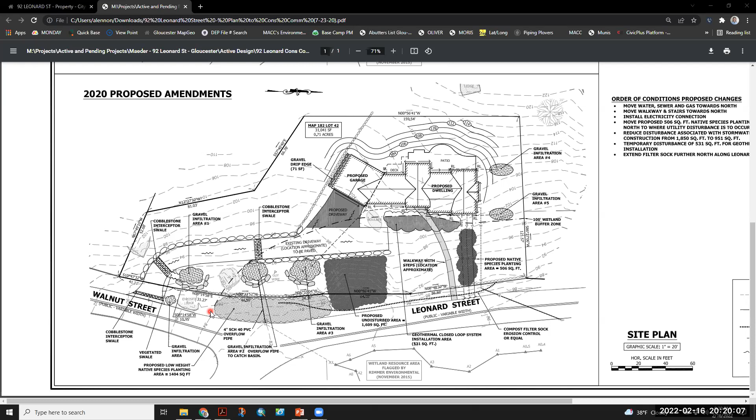That is completed, and we were able to get a tree cutter in there, just a two-man job that used ladders and ropes instead of cutting and dropping trees. They parsed them out and dropped them down on the ground, so there was minimal damage to surrounding trees. We did have some storm damage through the winter that they trimmed off other trees also in front. I think it looks pretty good if you've driven by there recently.

The house sits a little taller than we anticipated because we ran into blasting and could not go any deeper, so we had to raise the foundation a little higher than what it shows. We're anticipating planting some trees in the front, probably evergreens, that will block the view of the house from the street as you're coming down Leonard.

Not to cut you off, sir, but we're running late. So you're looking for a 1-year extension? Yes. Commissioners, do you have any comments or questions about this? I think it's pretty self-explanatory. I'm in favor of the 1-year request. If everyone's good with it, we can move to approve.

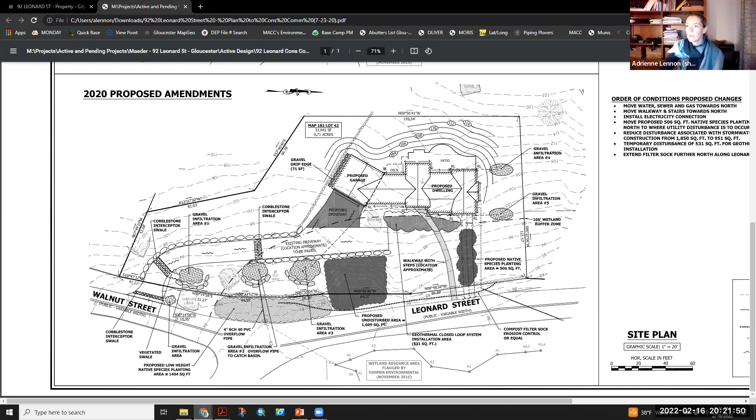Next up, extension 28-2540, One Rowe Square, Americold, Jonathan Delgado of Foth Infrastructure and Environment representing. And we might as well capture 28-2541, One Rowe Square, Americold, Jonathan Delgado of Foth Infrastructure and Environment. Good evening, Commissioners, thank you very much. Just for the record, the DEP file number 2540, the address is actually 69 Rogers Street. Not sure if that matters to clear up or not, but we are seeking to extend these two permits.

Unfortunately, due to lack of budget and timing with everything that happened with COVID, we were unable to complete all of the repairs as stated in the order of conditions, and we are looking to extend this out to allow us to complete the repairs and also align with the deadline for the Army Corps permit. How many years are you looking for, sir? We are looking for 2 years. I believe in 2020 we applied for an extension and were granted 2 years then, and I understand the limit is usually 3 years, but I figured I would try to get 2 years if possible.

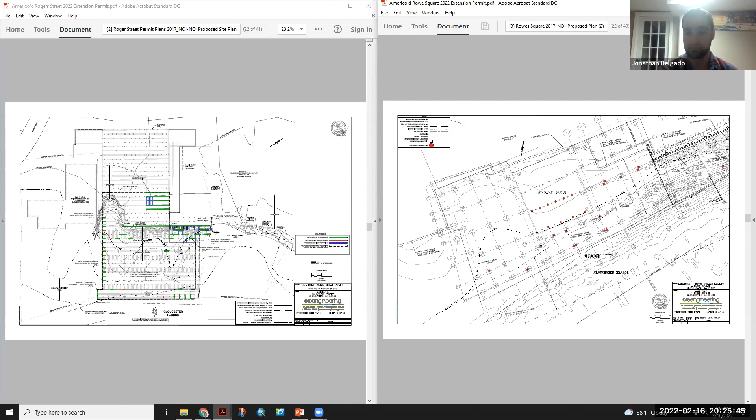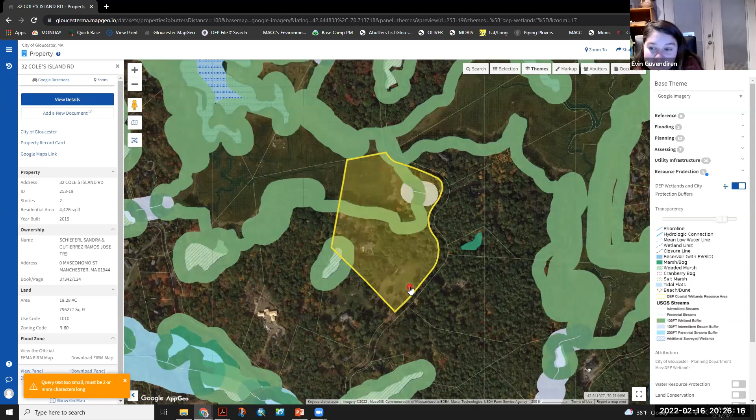Next up, extension 2634, 32 Coles Island Road, Gutierrez, Ramos, Evin Guvendiren at DeRosa Environmental Consulting representing. Sorry you had to wait this long. That's okay. Hi everyone, Evin Guvendiren here from DeRosa Environmental.

We are seeking a 3-year extension for the ecological restoration project approved at 32 Coles Island Road. The reason for 3 years is, one, COVID put a hold on the project, and two, we have not yet installed the native plantings. So to ensure the 2-year monitoring requirement, we would need the 3 years.

Understood. Commissioners, any comments, questions, or concerns about doing it? Two years, is that what you asked, or three years? Three years, please. Commissioners? Good, I'm seeing no comments.

All right, Joe, you want to move it? Yep. Commissioner Jackson moves to approve a 3-year extension for the purpose of mitigation planting and monitoring for 2 years, as well as the other reason named, for extension 0282634 at 32 Coles Island Road. Charpentier seconds.

Roll call: Commissioner Charpentier, yes. Commissioner Cook, yes. Commissioner Gradwell, yes. Commissioner Sargent, yes. Commissioner Sherman, abstain. Co-Chairwoman Jackson, yes. Co-Chairman Gullah, yes. Thank you.

You're all set, right, thank you. Sorry I had to wait so long. That was a long night. That's okay, have a good night. You too, now.